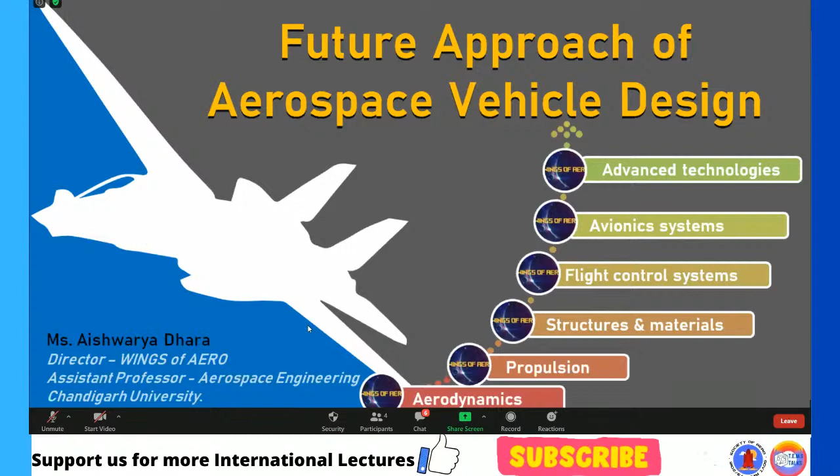Before jumping into aircraft design, you must know the very basic concepts about aerospace vehicles. First, I will give an introduction about the flight vehicle and its components, control surfaces, and basic movements of the aircraft. Then I will discuss the key factors required to design an aircraft, and a few case studies about the past, present, and future aircraft till the 2050 vision.

Before we begin, you must know what is meant by an aerospace vehicle: a vehicle which has the capability to fly in air within the atmosphere and outside the atmosphere. Aircraft can be classified into various types, first into lighter than air and heavier than air.

Lighter than air includes kites, balloons, and airships. Heavier than air can be classified into two forms: with engine and without engine. Without engine, we say a glider or sailplane. With engine, it can be further classified as an airplane, rotor wing, or ornithopter.

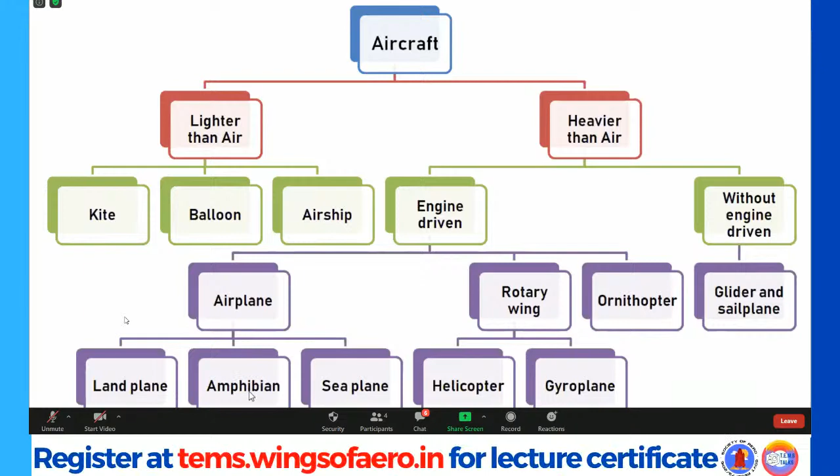Airplanes are further classified as landplanes, which land on land, not on water or other surfaces - most fighter aircraft and passenger aircraft land on the ground. Amphibians can land either on water or have the capacity to land on the ground. Then seaplanes, a very special type of plane which can land on water.

Rotor wings are further classified as gyroplanes and helicopters, both having rotor blades. So these are the basic classifications of aircraft.

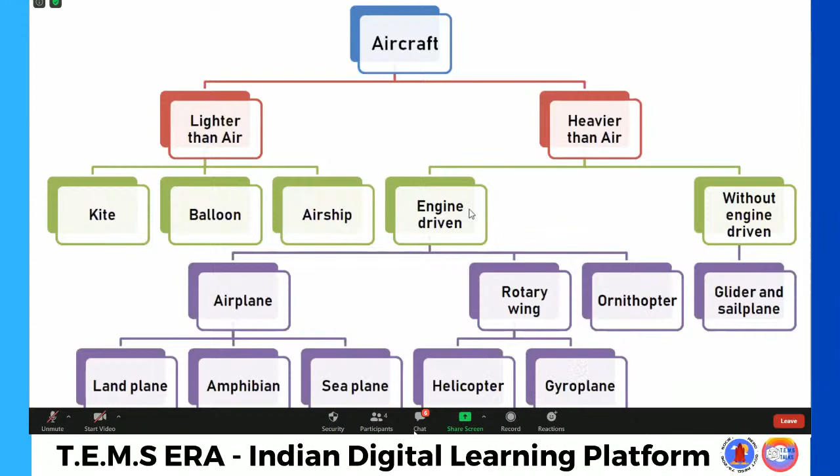Now we will see what are the flight vehicle parts. It is very important when we begin to design that we know the basic parts of an aircraft. You can see this is a sample aircraft in my hand. Basically, any aircraft has four basic units.

First is the wing surface, which helps produce lift. Then comes the intake, meaning the engine - here is the engine. What the engine does is help propel the aircraft forward, producing thrust. Then the tail.

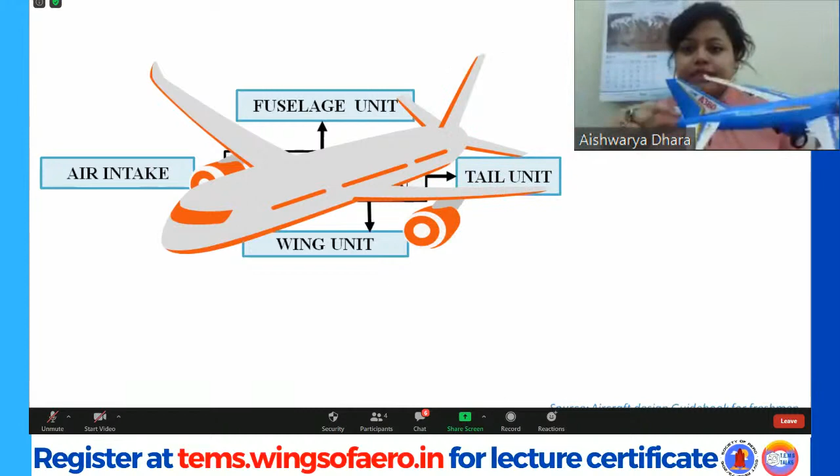We have two types of tail: vertical and horizontal. This is a vertical tail, with a control surface called the rudder. In the horizontal tail, we have the horizontal stabilizer and the control surfaces. Using the control surface called the elevator, we can make the aircraft move.

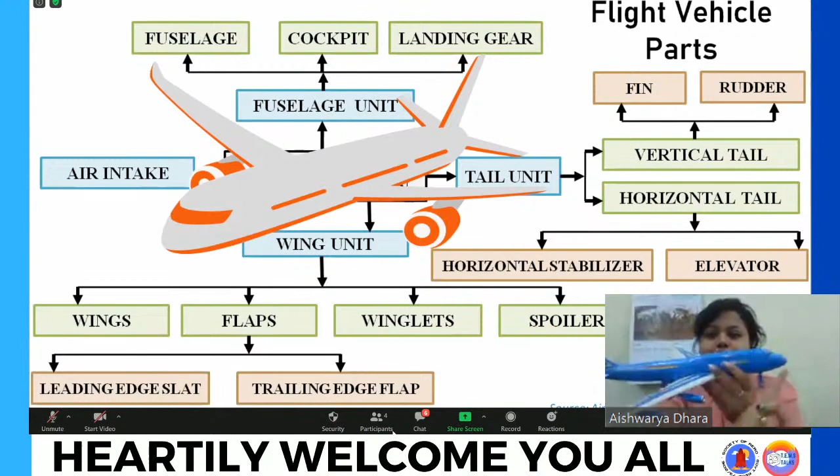Then moving to the fuselage section - the entire body where passengers are accommodated, where luggage is stored, or in military aircraft, where missiles are loaded. So these are the basic units of any aircraft or space vehicle.

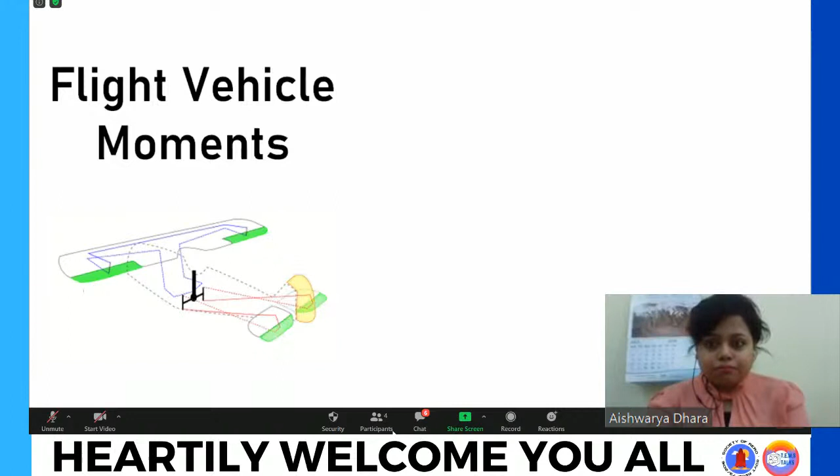Now it is very important to know the basic flight movements. Until you know these, it is difficult to understand how aircraft design begins. Basically, any aircraft has three movements. First is roll, done by means of the aileron.

The aileron is located on the wing surface. Here is a wing, with the starboard and port wing - also called the right wing and left wing. In this part, we have the aileron.

With the help of the aileron, when it deflects downwards, high pressure is created, which helps it to roll by creating high lift. On the other side, the aileron will be deflected upwards.

So what happens, due to the differential movement, it causes a rolling movement. This movement is called the rolling movement.

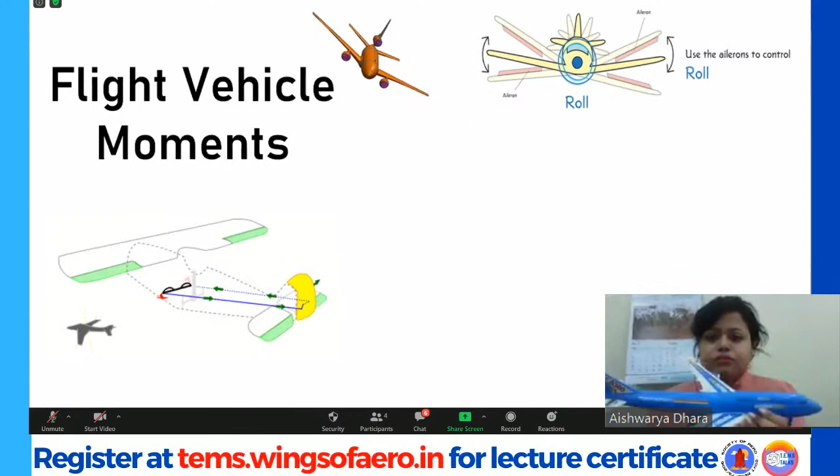Next, we have the pitching movement. Pitching movement is done by the elevator, which is located on the horizontal tail plane. Using this tail plane, when the elevator is deflected downwards, the nose will go in the downward direction because it creates a lift. This is how the pitching movement occurs, vice versa, nose up and nose down, by controlling this elevator.

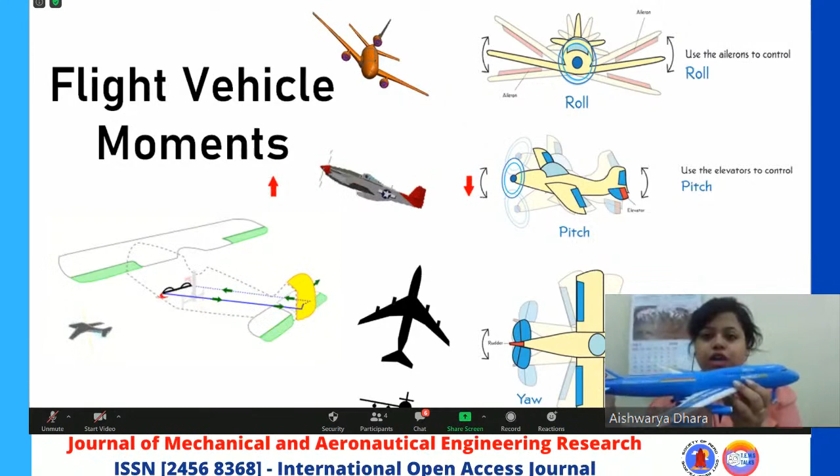Then the last one, we have the yaw movement. Yaw movement is done by the control surface called rudder, which is located on the vertical stabilizer. It can move left and right. Using the movement of this left and right direction, the nose can also move to the right and the left, vice versa. If the rudder is moved to the right, the nose will also move to the right. If the rudder is deflected to the left, the nose will also move to the left.

So this movement, the left and right movement, is called the yaw movement. These are the basic movements of any flight: rolling, pitching, and yaw. Now we will come to today's phase: what is the future of the aerospace vehicle technologies now, and what will be beyond.

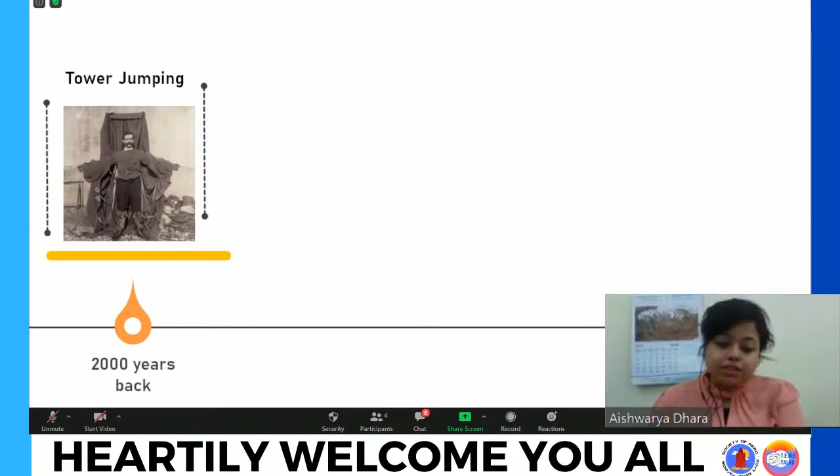Before that, you must know that for over 1,000 years, man wanted to fly and move from one point to another. There have been stories of people strapping bird-like wing structures made of stiffened cloth onto themselves and attempting to fly from towers. This is how, initially, 2000 years back, it was tried.

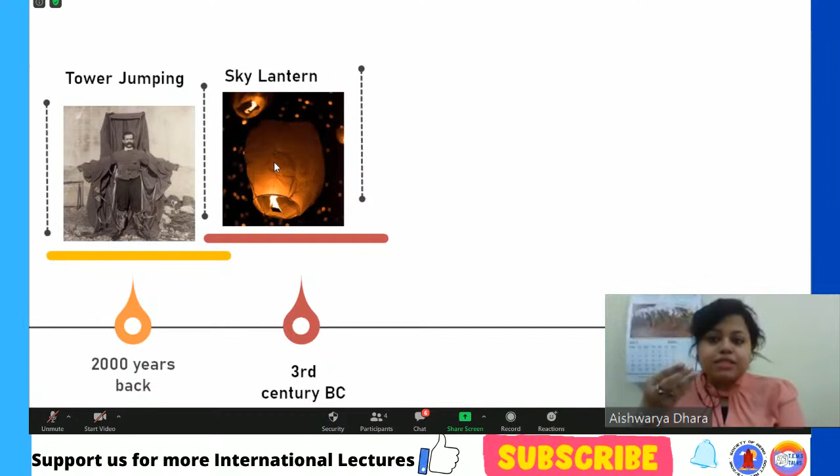Later, in the 3rd century BC, the sky lantern was developed, and the principle of the sky lantern is based on the hot air balloon. Once the air gets heated, the density becomes lighter, and as it becomes lighter, it lifts off. This is how the sky lantern was developed.

Back in the third century, China and other people used the sky lantern to scare enemy troops. Gradually, in the 18th century, the balloon became a major rage in this evolution, and it also helped provide an understanding of the relationship between altitude and the atmosphere.

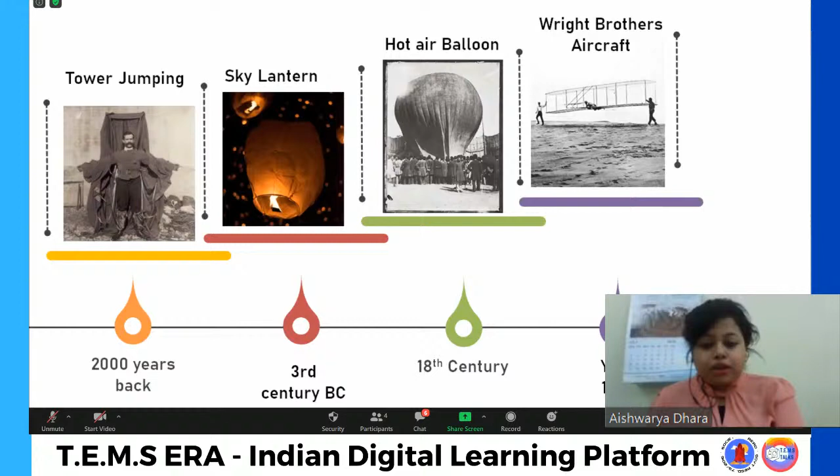Then, using a methodological approach to the controllability of the aircraft, the Wright brothers also built and attempted to build powered gliders in the year 1903.

After that, over a period of time, it evolved from the cloth and wood biplanes of the 1920s, where wing structures were made using wood and cloth mounted over it. Gradually these evolutions kept developing, and by the 1930s the first all-metal single-wing aircraft was developed.

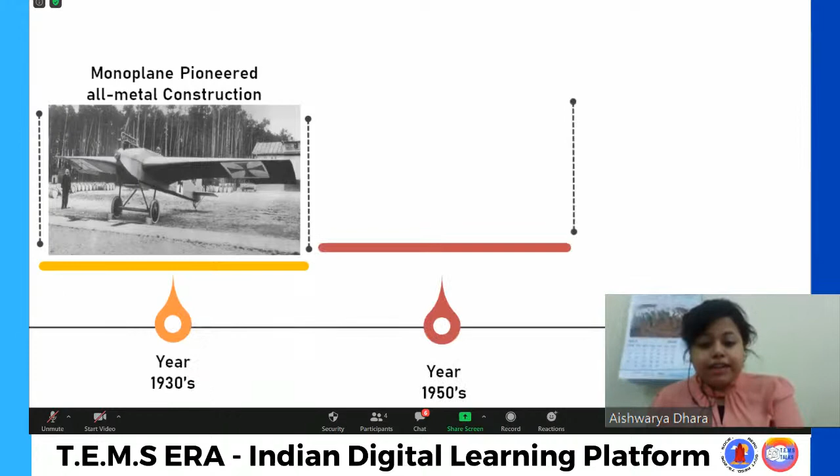From there it developed into 100-passenger transport aircraft in the 1950s, and gradually into the modern jet aircraft. This is the Airbus 380, a double decker, which has the capability to reach any point in the world within a single day. So this is how the aircraft of the 21st century may look, but it will be fundamentally different in the future.

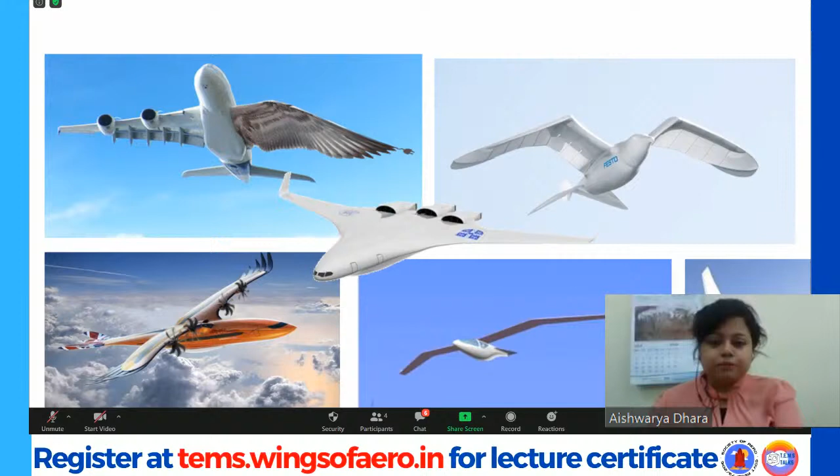All these inspirations begin from watching birds. As you know, everyone likes to watch birds, and when we look at birds, we feel like flying in the air. So this concept is biomimicry, or we can say engineering in nature's style.

Biomimicry is defined as the practice that learns from and mimics strategies found in nature to solve human design challenges. This is how even NASA has been inspired, and they have developed the very next generation, not as a blueprint, but as a biomimetic mode.

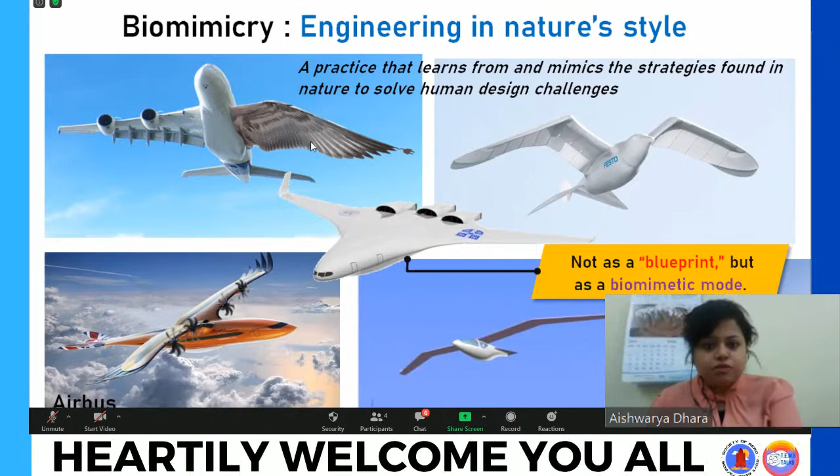As you can see, this is a blended wing body, which looks similar to a bird. Even recently, news came from Airbus that they have been developing a hybrid electric airliner, which aims to show the potential use of biomimicry in aviation design. You can see the winglets; they look almost similar to the feathers of birds.

So today our main concern is the aerospace vehicle design, which states that any design is an integration of new technologies and systems with the current and advanced configuration.

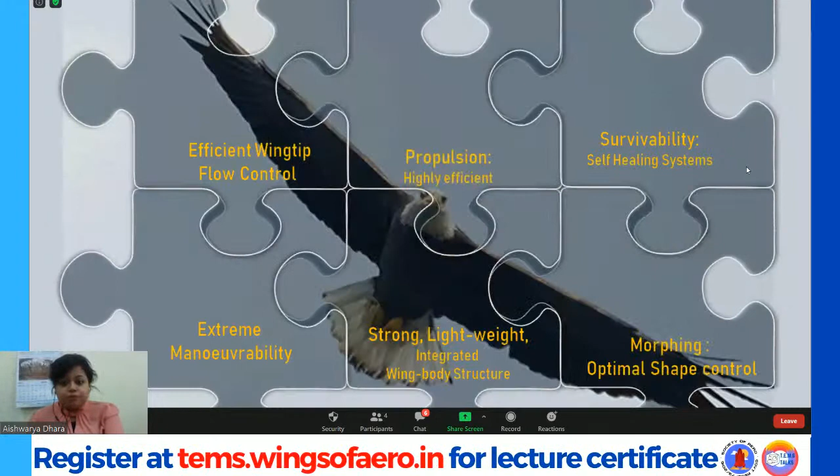Now consider our national birds. All we know is our national bird is the eagle. Eagles are being fully integrated with all the systems found in real aircraft, as you can see: efficient wing tips, propulsion system, survivability, extreme maneuvering, strong and lightweight design, and even morphing wings. The wing can be flexibly folded.

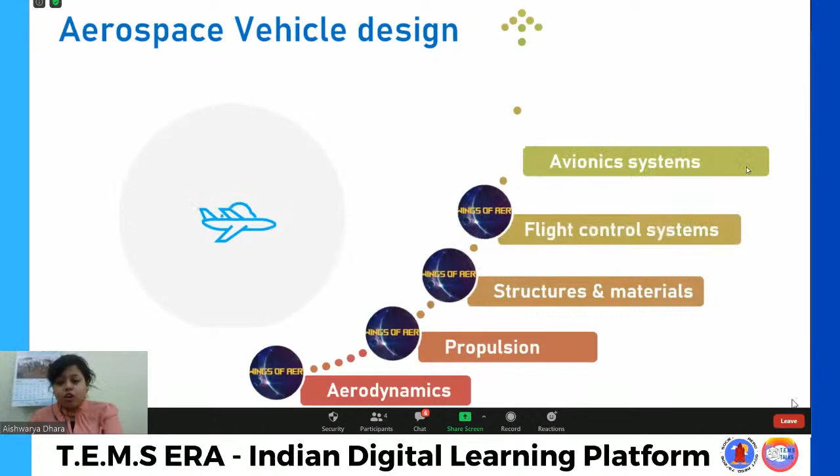So looking into this, an aerospace vehicle must aim to meet all the requirements for flying within and outside the atmosphere, and must have the following qualities. The first quality we need is aerodynamics. Next comes propulsion. Then structure and materials, flight control, avionics systems, and of course we need to develop some advanced technologies. Now we will look at each one deeply, how changes in aerodynamics, propulsion, structure and materials, flight control systems, avionics systems, and advanced technologies can improve aerospace vehicle design.

Now, before beginning any design, one must understand the following criteria and elements. First, what is the customer requirement, or what is the demand at present? That is very important to understand. Without understanding the present requirement, we cannot step forward to any design.

After that, in aerodynamics, the important factor is size and aesthetic. Size means in aircraft we cannot make a very bulky thing. We must optimize the size and shape, how it will look like - maybe the design of a fuselage, the wing structure, engine locations, and many more. More detail will come in the upcoming slides.

Then comes functionality. Whatever we are using, we must think about the function - whether it is useful to bring into the design or we must avoid it - and what are the weight factors, because weight is one of the prime concerns in aerospace vehicle design.

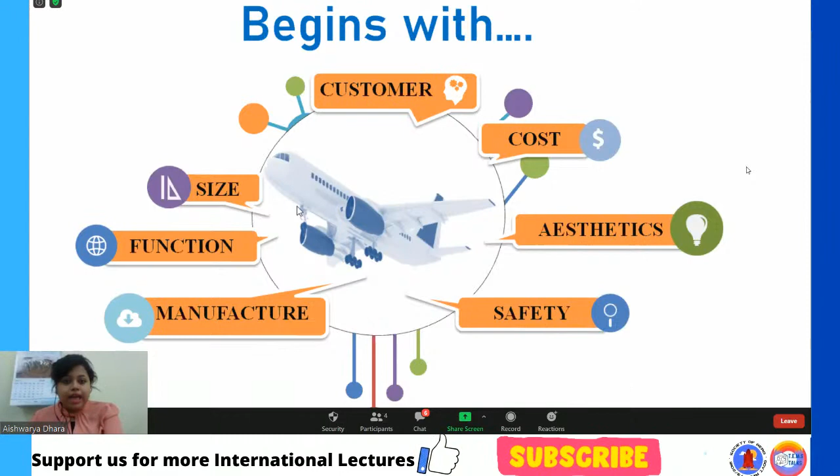So when we begin to design any aircraft, it is very important to know the following qualities. One must justify these qualities before they begin to design: first the requirement, then quality, size, aesthetic, function, manufacturing, safety. Safety, when we talk about passengers, is another big concern. Then of course the cost - we must reduce the cost of the aircraft. So these are the factors.

Now we will see how all these factors create a huge impact on aerospace vehicle aerodynamics, propulsion, structures, flight control systems, and advanced technologies. Now we will start with aerodynamics.

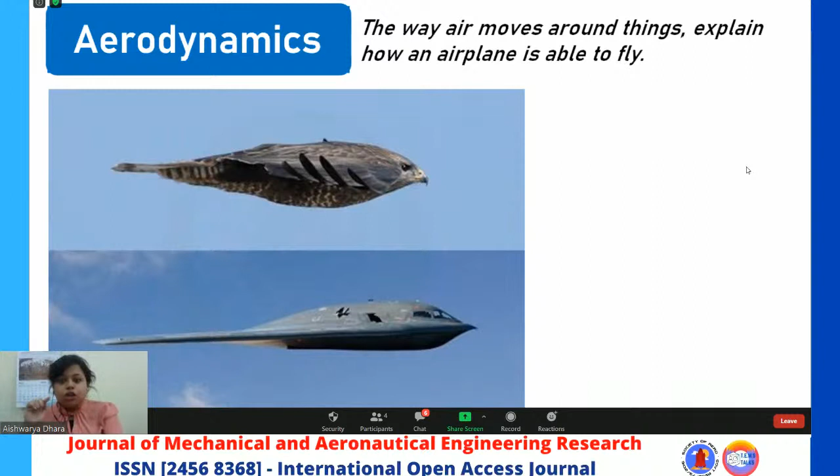Now, this aerodynamics - first we'll see what is aerodynamics. Aerodynamics is the study of flow over any moving body. Here we are concerned about reducing the drag of the aircraft, because by reducing drag we attain better fuel economy. As you can see, when the flow moves over the bird, it has a streamlined pattern. So we must remember, when we design an aircraft, it must have a streamlined pattern - that is one important factor. The second factor is a smooth surface. By creating a smooth surface, we help to resist and avoid creating air resistance to the flow. So we must have a very smooth surface. These two are the main criteria.

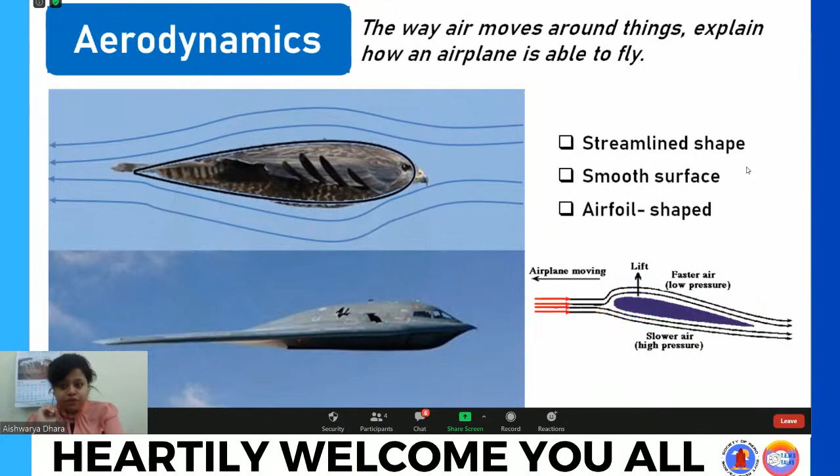Now the streamlined pattern is technically called an airfoil shape. As you can see in the bird, when we define the structure, it comes as an airfoil shape. What is the benefit of the airfoil shape? We will see - it helps to produce lift. As we increase the angle of attack of this airfoil, the bottom part creates high pressure and the top has low pressure. To bring equilibrium, the flow tries to move from high pressure to low pressure, so it naturally pushes the object up, creating lift. This is how this concept evolved.

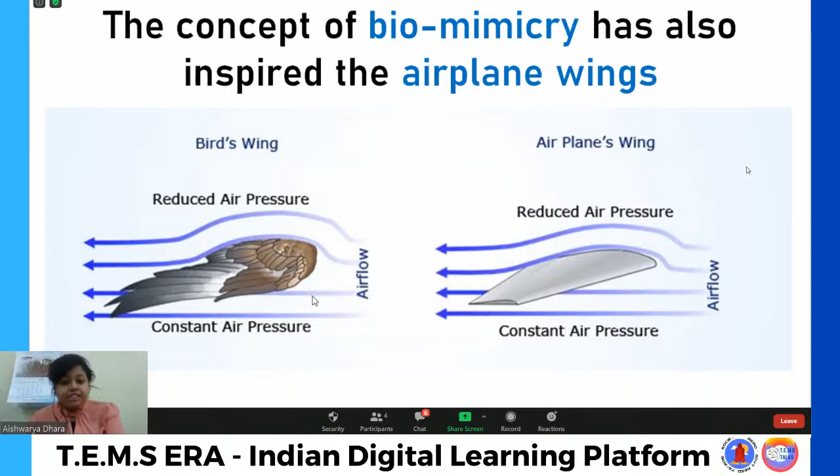The concept of biomimicry has evolved to inspire the aircraft's wing structure. When birds want to take off or land, they raise their wings - the same concept has been used in the aircraft wing system.

When we talk about the wing shape, it is one of the main parameters that drive the aircraft performance to meet the aerodynamic optimization, or aerodynamic shape optimization. This plays a great role in designing the wing.

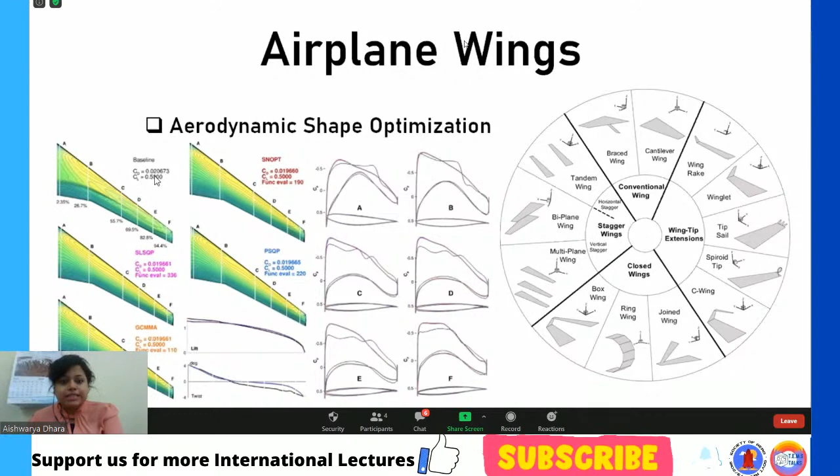Now how can we do this aerodynamic shape optimization? There are so many tools at present. You can see here one example from research that is going on. This is the structure of a wing split into various sections, A to F, each with a different airfoil - a streamlined cross section of the wing. They look at the pressure coefficient on the top and bottom surface when flow passes at a certain level. They use several optimizing parameters and bring the result close to the same. This is how aerodynamic shape optimization is done before they actually manufacture the wing.

Before you start designing the wing, you must know the flight speed. The flight speed can be defined in aeronautics by means of Mach number, which is the speed of the object divided by the speed of sound. The speed of object means the speed of the flight vehicle, and the speed of sound is generally taken as 340 meters per second. This is how we define the Mach number.

Based on this Mach number, the flow is subcategorized into subsonic, supersonic, transonic, and hypersonic. Subsonic is when the Mach number is less than 1. Supersonic is when the Mach number is greater than 1. Sonic is when both the speed of the vehicle and the speed of sound are the same. Transonic is the transition between subsonic and supersonic, ranging between 0.8 and 1.2 Mach number. Hypersonic means when the Mach number is more than Mach 5. This is how we subcategorize, and based on this category, we need to optimize the structure or design of the vehicle - this is a prime concern in designing the aerodynamic parameters.

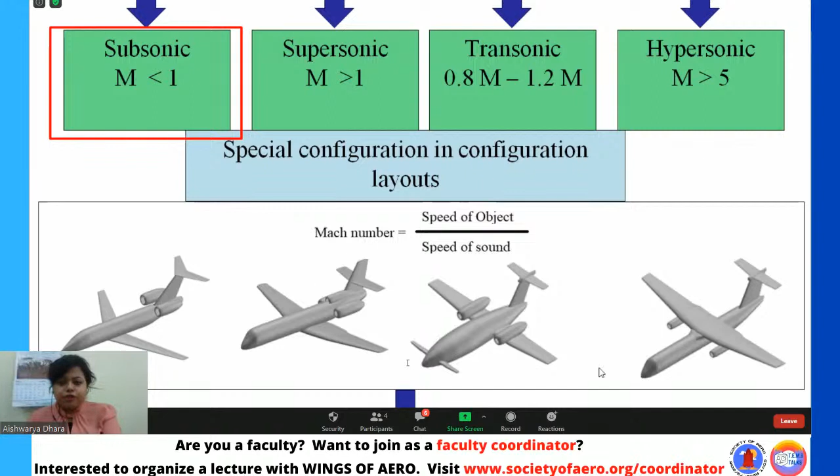There are four types of designs on display based on various wing locations. The first has the tail near the tail section in an inverted V shape, a low wing, and a very sharp nose cone. The second has a flat bottom part, a conical nose, three engines, and a cruciform tail configuration. There are a lot of differences among the four designs. Based on aerodynamic performance and optimization, you must conclude which design will be beneficial, keeping in mind shape, size, function, manufacturing, safety, and cost. All these constraints must be satisfied.

This optimization can be further extended. For example, there is much difference when you design for subsonic versus supersonic. Subsonic is when the Mach number is less than 1, and supersonic is when the Mach number is greater than 1.

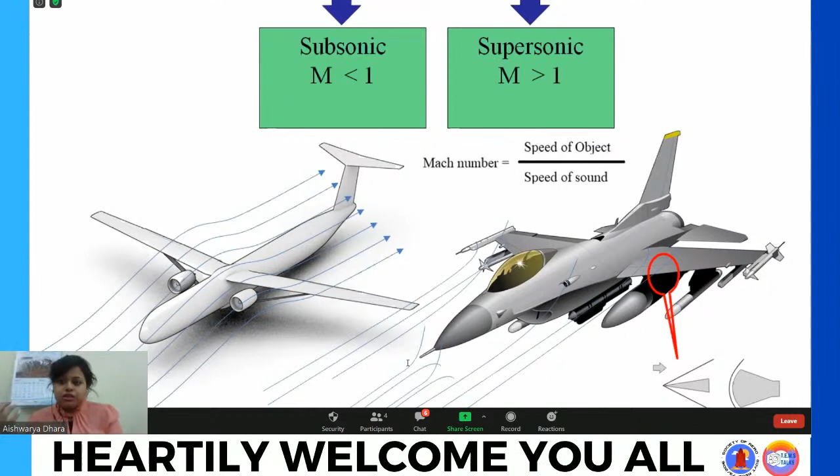It will create a detached bow shock wave, and in this bow shock wave it creates a heavy pressure difference in front of the structure. Due to this pressure buildup, it can also cause structural damage, and if it causes structural damage, the aircraft is no longer stable.

It can lead to a fatal accident. So keeping this constraint in mind, when we are designing for a supersonic aircraft or supersonic speed vehicles, we must have a sharp leading edge or sharp edge on all the leading edges. Also, when the flow moves along it, it creates an attached shock wave. These are the constraints we must clearly remember before we develop any aircraft.

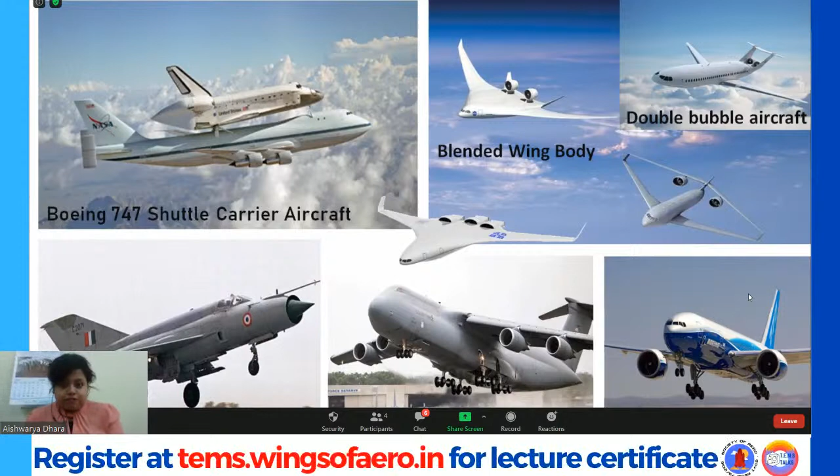So many things are happening, and in the future there are some upcoming vehicles. NASA and others have tested blended wing bodies, as you can see. Then this is the double bubble design, one of the upcoming generations. NASA has predicted that in the upcoming generation we will have such kinds of aircraft. The current designs will become obsolete, and the blended wing body will account for around 50 percent growth by the 2050s.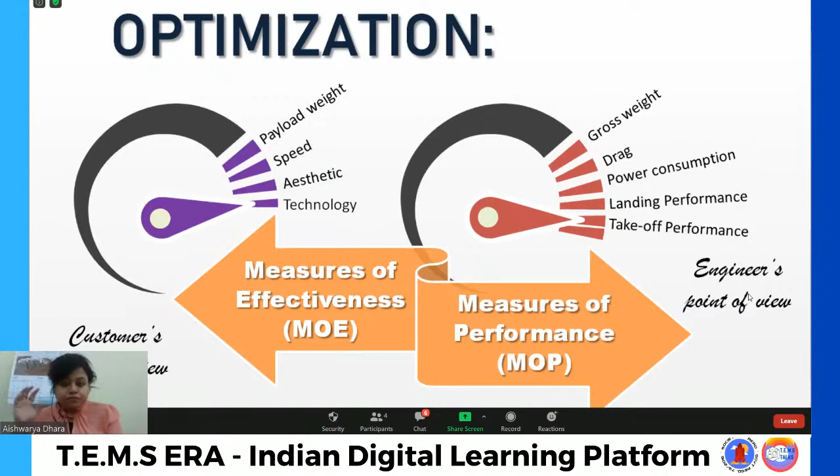The more the drag, the more the fuel consumption and the lower the performance of the vehicle. So the aerodynamic design will be much more effective. If we can reduce drag, it will help improve efficiency and enhance performance. This is why aerodynamic shaping is a prime important factor to design any aircraft.

Many people keep asking whether the blended wing body will be the future. Yes, of course it will be the upcoming future. 50% of aircraft will be of the blending body type. Now how? There's a wonderful story behind this blended body concept.

This blended body concept started in the 1920s, developed by a scientist named Nicolas Woyevodsky. He developed and tested it, but during the test he had an accident, so that design was abandoned. Then in the 1940s, another scientist, from Miles, developed the M.26 project. But after developing and testing it, they didn't find much difference in performance, so it was again obsoleted.

Then NASA took over the concept in the 1990s. Gradually, through continued research, they developed a small prototype unmanned air vehicle, the Boeing X-48. They designed it with a payload capacity such that around 450 to 800 passengers could be accommodated in that particular aircraft. You can imagine what a huge amount that is at one time.

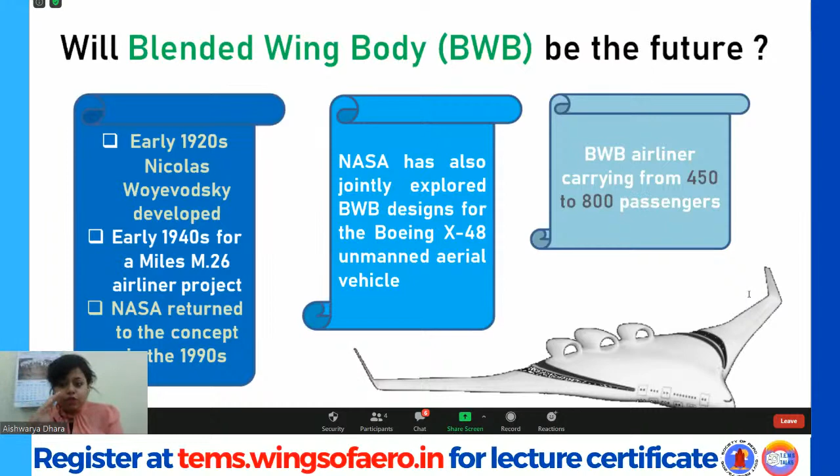They also found that, compared with the conventional aircraft, around 20 percent fuel savings could be achieved. This is a wonderful concept, and as you can see, it's almost like a bird-like structure.

Even recently, news came from Airbus on the 11th of February that they have fundamentally demonstrated this blended body concept. They have also declared that by the 2040s to 2050s, blended wing body airlines will be implemented for about 50 percent of aircraft. They have stated that clearly.

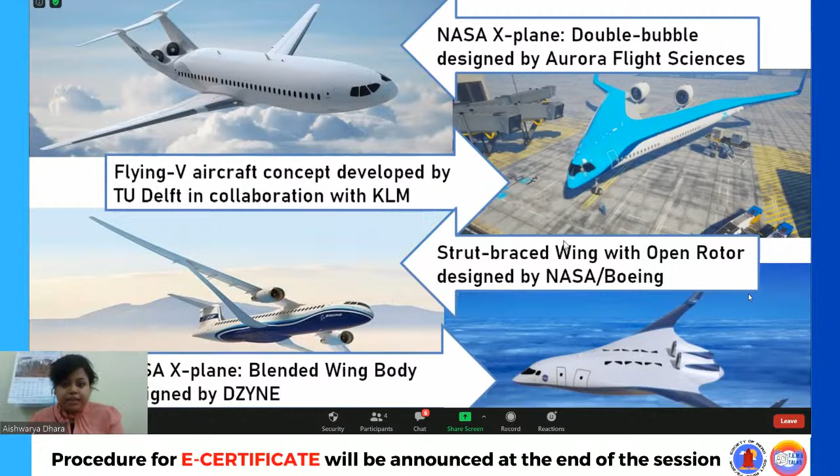Not only the blended body, but a lot of research is going on with designs like the double bubble design, and also this V-shaped wing you can see here. Then there's the strut-braced wing, along with the blended body. These are the upcoming futures of aircraft.

Now when an aircraft is flying at some altitude, it must undergo some kind of loadings on its structure, such as air loading, inertial loading, loading due to the power plant, meaning the engine, loading due to landing, takeoff, taxiing, towing, jacking, or even bird strike. These are the following loadings an aircraft can undergo. Based on that, it's very important for a designer to design the structure accordingly.

Based on this research, researchers modify the structural design of the aircraft for these applications. The structure of the aircraft consists of ribs, which give the defined shape of an airfoil in every section. Then we have the stringers, which attach from the root to the tip, running longitudinally. Then we have the spars, mostly of I-shape or C-shape, as you can see here. All these supports give the structure its rigidity. These are the basic structures.

In advanced research, they have modified the structures based on the type of aircraft. When we talk about multi-rib wings, it means the number of ribs will be more compared to the stringers or spars. Multi-ribs are mostly used for transport aircraft, such as passenger aircraft and cargo aircraft.

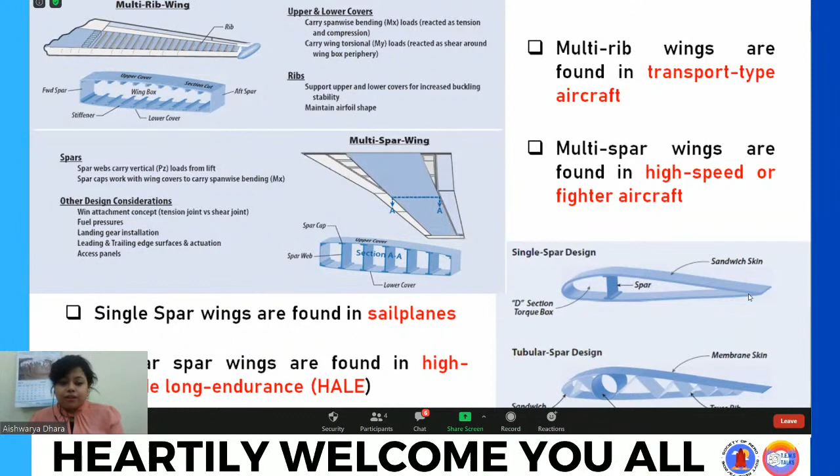An amazing design has been done as a tubular spar design. These tubular spar designs are used for high altitude long endurance aircraft. High altitude means going more than 15 kilometers from the ground up toward the atmosphere. Endurance is a term used in aviation meaning how much time the aircraft flies in the air. Long endurance is when an aircraft can fly more than 24 hours, not less.

For such aircraft we use this tubular spar. These are high altitude long endurance aircraft, mostly UAVs, like the well-known Global Hawk and the Boeing Phantom Eye. These have wide applications for surveillance, and some are used for predicting atmospheric properties and other factors.

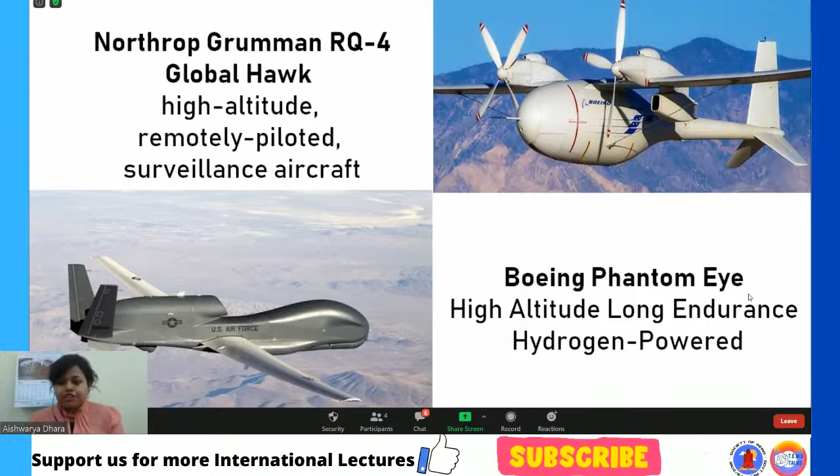Once we move out from these structures, another important thing humans have aimed to discover is an alteration of the design. This concept was developed by watching birds: when birds want to move faster, they flap their wings. The same principle has been implemented in planes, called wing morphing.

Most modern aircraft use a fixed wing, as shown in previous slides, meaning the angle cannot change. But with a morphing wing, the aircraft can have multi-role capability and can sustain in the air for longer, even during flight.

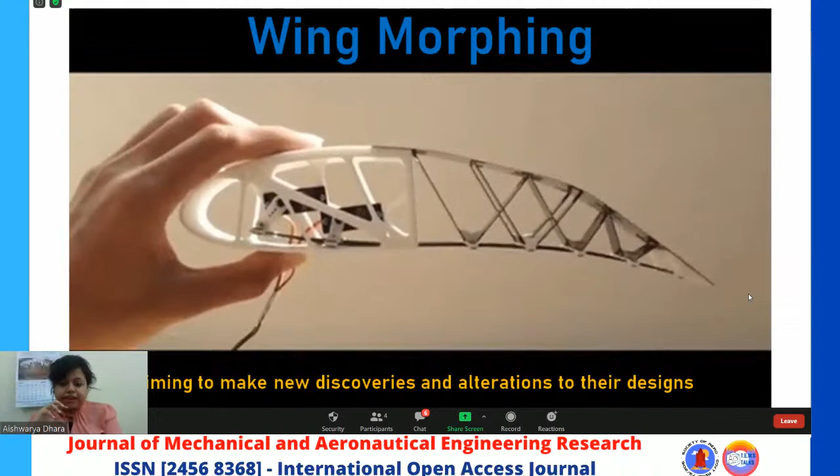Scientists have said that when the wing transforms, it is easy to steer in the air and it flies much easier than a fixed wing. A lot of research is going on; even NASA is pursuing this study, getting inspiration from biomimicry-inspired aircraft, using many advanced materials that are lightweight and more effective to build.

Weight has been a prime concern for decades. Aircraft builders and designers working on wings have the main concern of making them strong and stiffer. These structures look almost bird-like, as they've imagined the bird and implemented it in the wing structure, and this will be the future.

They achieve this by using new smart materials embedded with sensors and actuators. These sensors measure the pressures over the entire surface of the wing, and the signals actuate how to respond, like a feedback mechanism responding to one another.

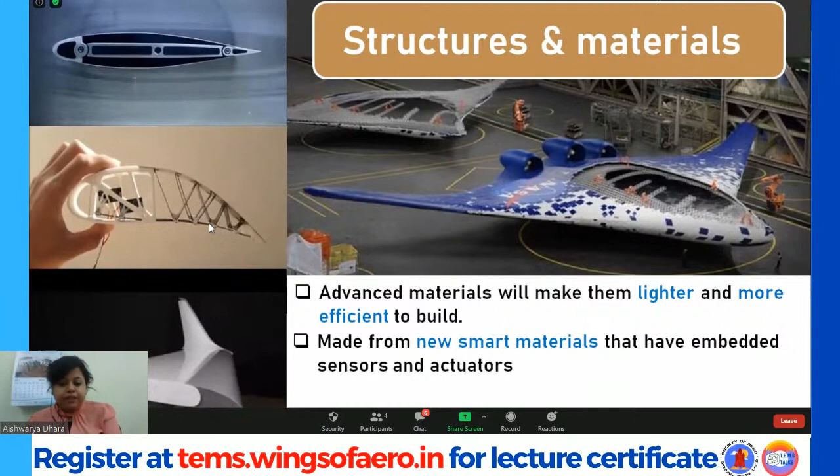Tiny computation elements detect how the aircraft responds to the signals, and eventually they learn how to change the shape of the wing and optimize based on the flying conditions, using data from the sensors.

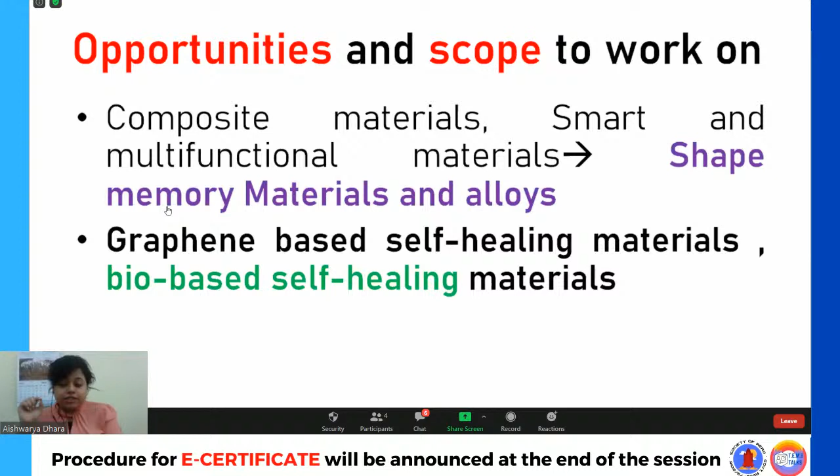There are wide opportunities to work on: composite materials, smart materials, multifunctional materials like shape memory alloys, graphene-based self-healing materials, and in the future bio-based self-healing materials, since fossil fuel resources will become extinct and oil prices will rise, so the only option will be bio-based.

Another wonderful area is studying the effects of metamaterials on aeroacoustics, like radar absorbing materials. These implementations are mostly used for fighter aircraft, known as stealth technology.

This is all the growth of composite materials. In the Airbus 350 XWB, they have used around 53 percent composite material. Looking at the Boeing 787, they have used almost 50 percent.

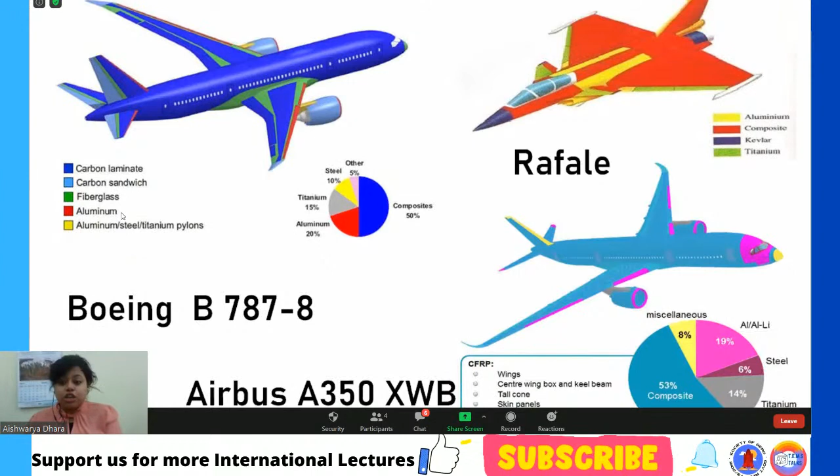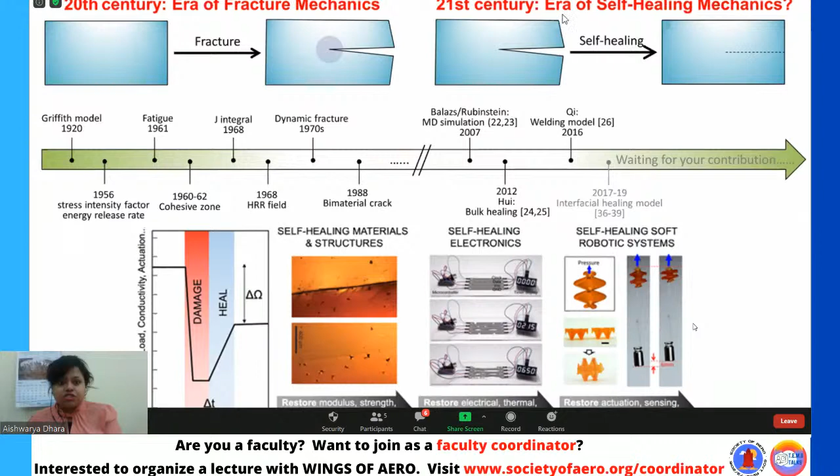Before, in the 20th century, they were studying fracture mechanics, how the fracture begins. But today, in the 21st century, they are studying how the self-healing mechanism is going to work, and more detailed, more awaiting technologies are going to come. Now, after this, the material structure part is done.

Now after the wing we will come to the propulsion, which allows the body to move forward. That means the engine needs to integrate the health management systems.

In an aerospace vehicle, engines can be classified into two types: air breathing engine and non-air breathing engine. Air breathing, by the name itself, means the system will operate within the atmosphere. Non-air breathing will be applicable outside the atmosphere.

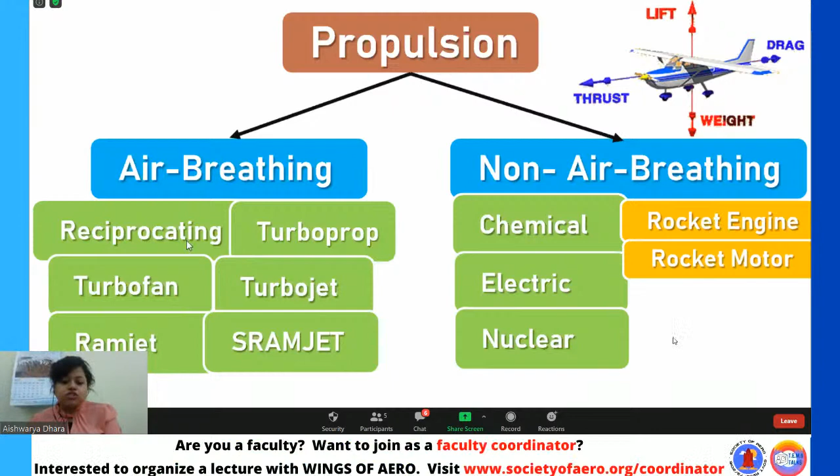When we talk about non-air breathing, that comes to rockets and such, which can be chemical, electrical, or nuclear in the future. But air breathing has been classified as a reciprocating engine, which we know as a piston engine, then turboprop, turbofan, turbojet, ramjet, scramjet. Now, the applications of these engines need to be considered based on the speed.

The flight speed should be of Mach 0.3 or less than that. Beyond that, the aircraft performance won't be successful.

Then as we gradually increase, let's move to the turboprop. Turboprop is almost like 0.5 Mach number. At 0.5 Mach number only, it gives the maximum efficiency.

Now gradually moving to the turbofan. Turbofan can be of high bypass ratio or low bypass ratio. As we increase and go nearing the transonic speed, that is 0.8 Mach, we use this turbofan.

Beyond that, when we start using fighter aircraft, beyond Mach 2, we use a turbojet. As we increase the speed further, afterburners are implemented. Ramjet is not starting from zero because it needs an external device to accelerate it. Similarly, the scramjet needs an additional device to boost up its performance. Then comes the rocket, which can reach more than Mach 6.

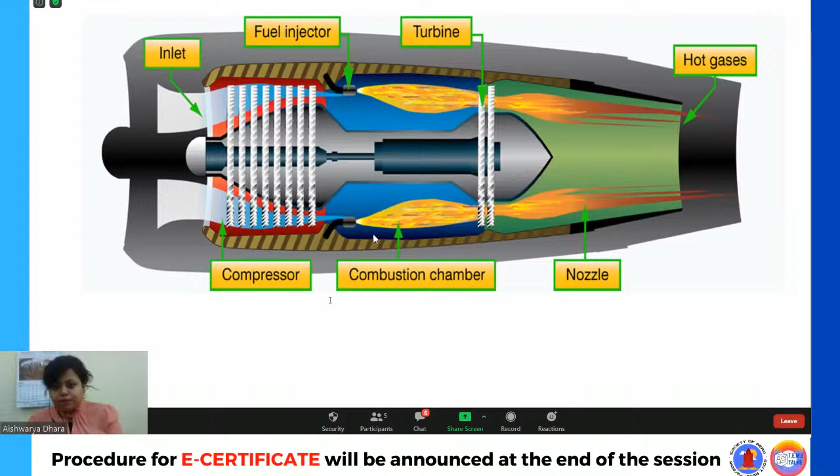As it gradually moves to the combustion chamber, what happens there? Similar to the piston engine, fuel injection takes place through a fuel injector. The compressed air and fuel get mixed up, and that hot gas moves and expels out from the turbine and gradually out from the nozzle. This nozzle helps create very high kinetic energy, which forms a thrust that helps the aircraft propel forward.

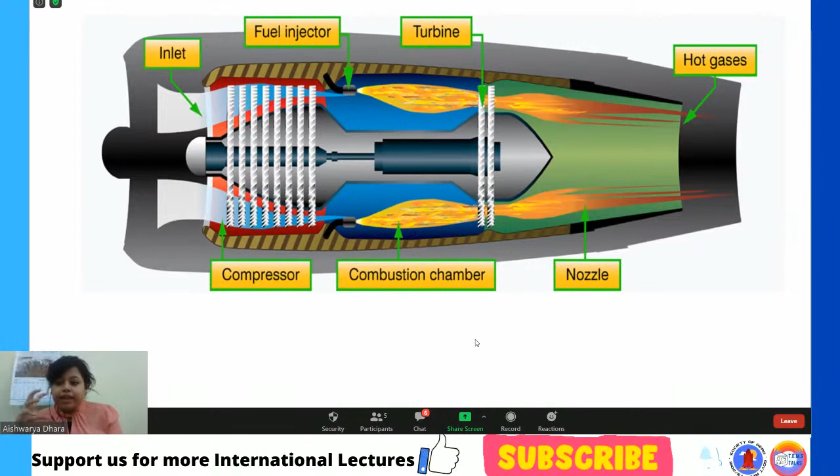But what happens with this exhaust gas when it expels out, in most cases, is that there are a lot of unburned gases, and due to this, it causes pollution in the environment. So now it comes to the point of research: how to improve engine efficiency.

Now once we increase the engine's efficiency, we can consume the fuel better, and due to that consumption of fuel, we can lead to better mixing of the compressed air and fuel in the combustion chamber. So there are many ways that we can reduce pollution, or take care of the environment. These are the futures.

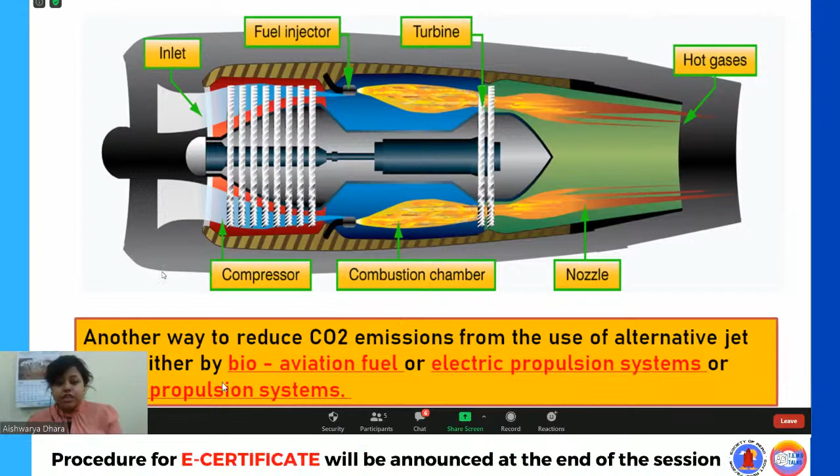They're looking at renewable energy sources, another way to reduce carbon dioxide emissions, by means of alternative fuel use in gas turbines, or electric propulsion, or hybrid propulsion systems. These are the categories we can look into for aircraft design, by changing the fuel system, either by electrical propulsion, completely run by batteries or electrical system motors or superconducting devices, or by hybrid, meaning both electric and aviation fuel. So by that we can balance the environment.

So there is a lot of research going on. You can see the hybrid electrical flight, as the Cri-Cri was the first to begin. This aircraft was developed as a turboprop aircraft before, around 1997, by Michel Colomban in France. Later he changed that turboprop engine into an electrical engine, and he successfully flew it in 2010. That is the Cri-Cri, the first development of hybrid electrical flight.

Then gradually it kept increasing, and Airbus also started with hybrid electrical propulsion, eFan 1.0. With further developments, today in 2020 eFan X has been developed, and they say that eFan X is a disruptive technology, a very unique thing.

That's what is meant by disruptive technology. It is a kind of technology which displaces the established technology that is currently in development, and which will bring a revolution in the industry, and which cannot be replaced by anyone else, and will be superior to any other technology. That is what is meant by disruptive technology, and that will be the upcoming vision of the 2050s.

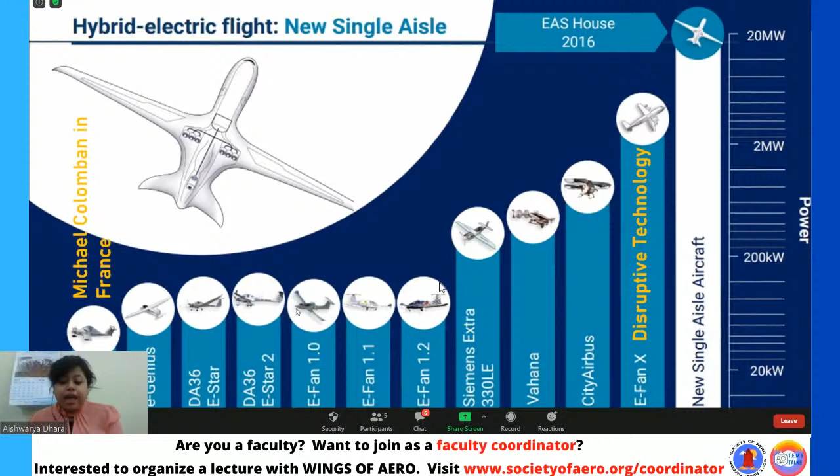The eFan X has been developed, and achieving these goals is really a very challenging task. Particularly by 2050, they have declared that 50 percent of the carbon footprint has to gradually go down. With that, many people are working together, starting from aircraft manufacturers, airliners, and airports. All the four pillars are the technologies for aircraft and engine, sustainable fuel, operations infrastructure, and market-based measures. All those factors are a great concern.

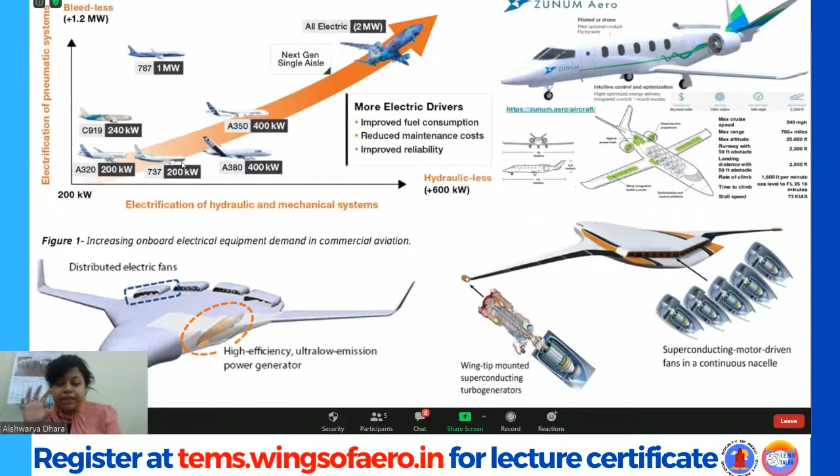I would like to show you one more startup company from Washington, Zunum Aero. This name is derived from hummingbird. They developed this aircraft between 2013 and 2018, and their main concern was a 50-seater passenger aircraft, driven completely by electrical power, maybe hybrid electrical power. So this is what the future will look like. All that we are looking at now will become obsolete.

As you can see here, superconducting things are used. Superconducting motor drives and fans are used in the nacelle to move it forward. In addition, this electric power is also used to drive the internal systems of the aircraft, and so on.

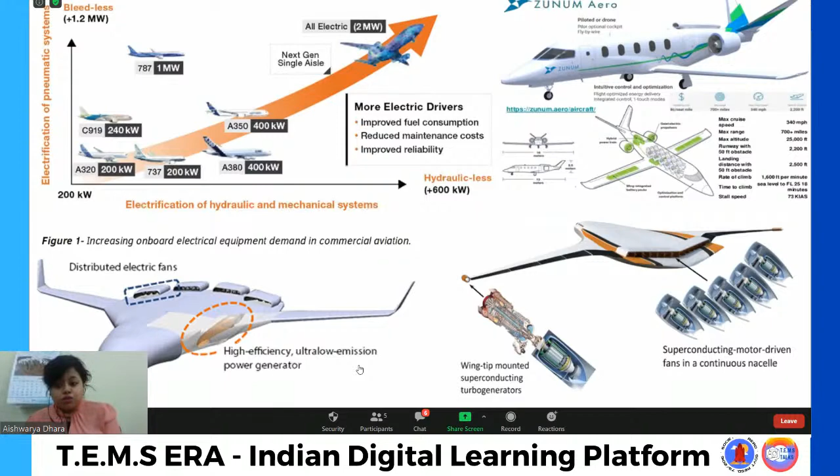This is the strategy, showing what electrical power designs and what amount of power has been developed. You can see Zunum have designed around two aircraft. One is 4 to 5 megawatts, another is 15 megawatts, both having a capacity of 50 seaters. We can see around 80 percent carbon benefits, not in the present, but they expect to reduce the carbon footprint by about 80 percent from that particular design, maybe by 2035 or so.

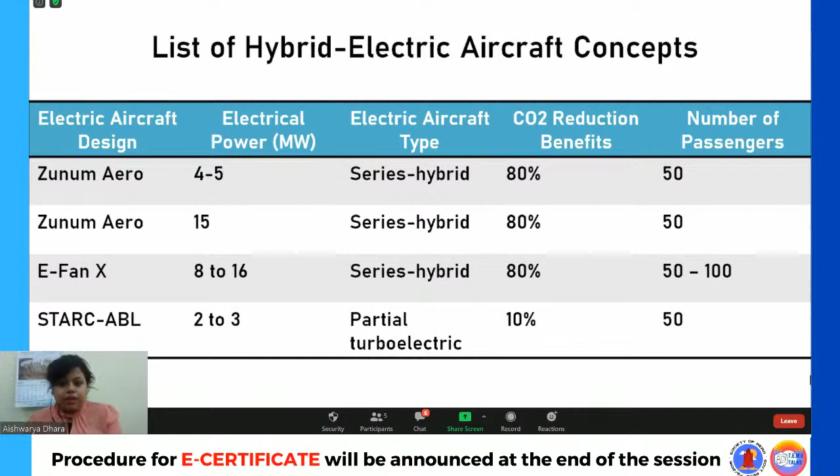So that is that. Now coming to talk about the aerospace vehicle outside the atmosphere. Outside the atmosphere, we cannot use these air-breathing engines. We need to use aerospace vehicles like rockets and so on.

Recently, all of you have seen the launch of the SpaceX Crew Dragon mission, where they used the Falcon 9 rocket, which is a new development, a reusable launch vehicle, which will launch the Crew Dragon into space, and after that it will automatically land back on water bodies or the station where they have been navigated to.

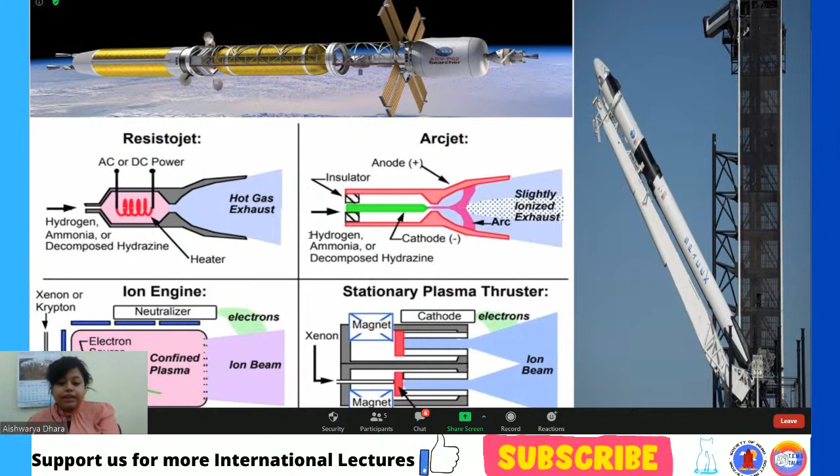So this is what the reusable launching systems will be in the upcoming future. Even ISRO is working on it. Then, sooner or later, electrical propulsion will take up. Research is already going on about microgravity, where NASA is experimentally working on the staging of electrical propulsion systems for interplanetary systems. Everything is still under research, and nuclear and electrical propulsion space systems are being considered for longer missions in the future.

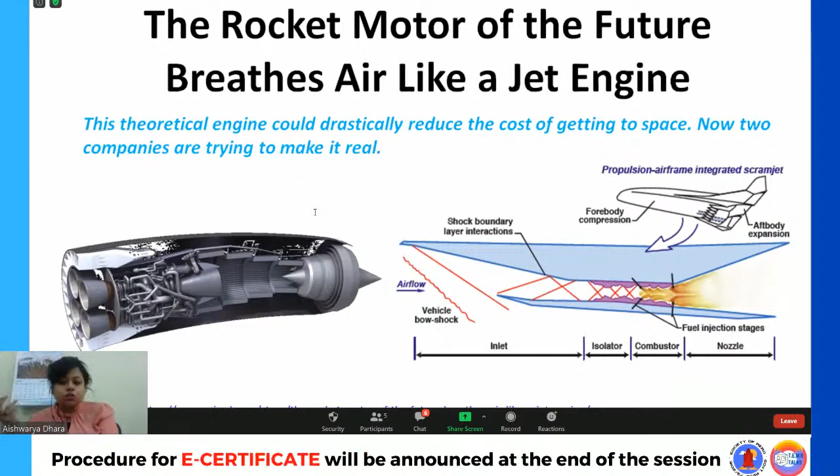So here's one more recent news about the development of rocket motors of the future that breathe air like a jet engine, functioning almost like a scramjet. Two companies have tried and tested this, and it has shown results that it can attain the speed of Mach 5. If it happens, it will be a great step towards the world's first air breathing engine which has the capability to accelerate from 0 to Mach 5, meaning it can be self-accelerated and does not need any external source to launch.

So these are the upcoming things, and a few more new engine architectures have been developed, this one by Rolls Royce. Presently work is going on for the advanced ultra fan engine. Rolls Royce is expecting a 20 percentage reduction in fuel burn and CO2 emissions, comparing with their present model, the Trent 800.

Then Safran is also developing another design, the ultra high bypass ratio engine. They have shown that a minimum of 25 percentage of fuel burn and CO2 emission will be less compared with the Rolls-Royce Trent 800 engine.

So huge work is going on, and soon this Safran ultra high bypass ratio engine, which has a bypass ratio of about 15, uses a very unique design with lightweight composite material, helping to reduce fuel consumption by 5 to 10%. They have optimized it and found this kind of engine can be installed in the Airbus 320 Neo family, which comes under the narrow body category.

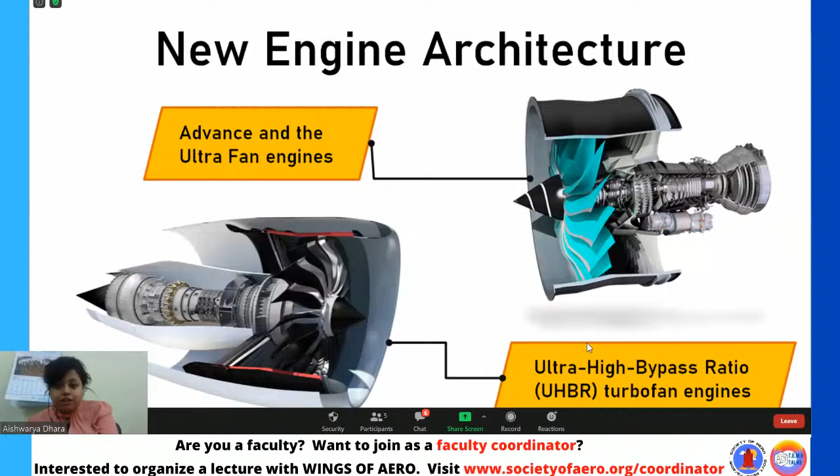So you can understand why this ultra high bypass ratio turbofan helps, because once we increase this bypass ratio factor, the overall efficiency will also increase, and if efficiency increases, the specific fuel consumption of any engine will decrease. So these are all the advanced technologies coming up in the upcoming days.

When you begin to design an aircraft, selection of the proper engine is one of the challenging tasks. In addition, talking about fuel consumption, not only the engine can help, but also subsystems of the aircraft can help grow the industry. So advances in aircraft systems can also help reduce fuel consumption considerably in current aircraft configurations.

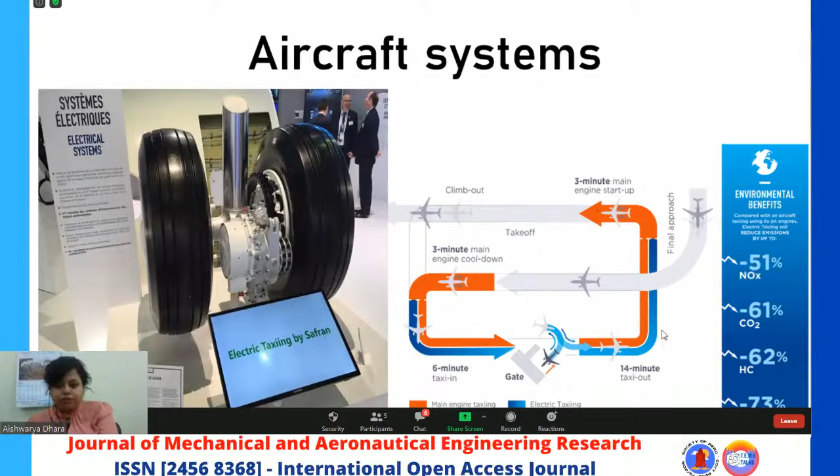Safran has developed electrical taxiing. So they have developed electrical taxiing for the ground, from the aerodrome to the taxi before it takes off. At least they can use this electrical system, reducing a considerable amount of environmental impact. So this is also one of the futures.

Now in upcoming days, there are many developments coming, like elevon systems coming up, because some space shuttles use the elevon system. Apart from that, we will look at what advanced systems and the growth of flight control systems look like. Initially, flight control systems are done by the pilot controlling the control stick or the joystick. The signal is responded to by computers or sensors, and it goes to each control surface, actuating it according to the motion given by the pilot.

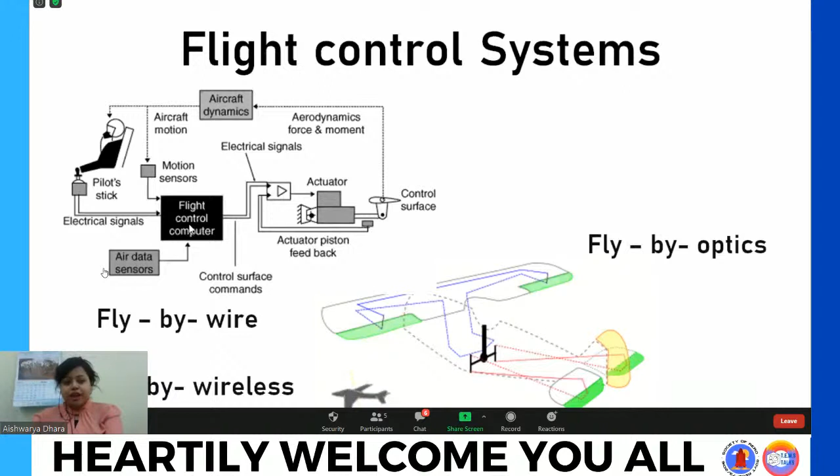But all these are the mechanical system. Now the mechanical system has been converted by the fly-by-wire system. Mechanical has been replaced by the wire mechanism, which they found, by using wires, they can reduce the weight of the aircraft.

Now gradually what happens, from the wire system it has moved to fly-by optics. Compared with the wire system, when they go for the optic system using optical fibers, they found there is a huge change in the gross weight or total weight of the aircraft. So weight is a prime concern, as I've said, a small change in the control system can affect the performance of the aircraft. So fly-by-wire has been converted into fly-by optics using optical fibers.

So they have used a redundancy process. If one fiber fails, another will take over it. So there will be a lot of data bus avionics systems into it.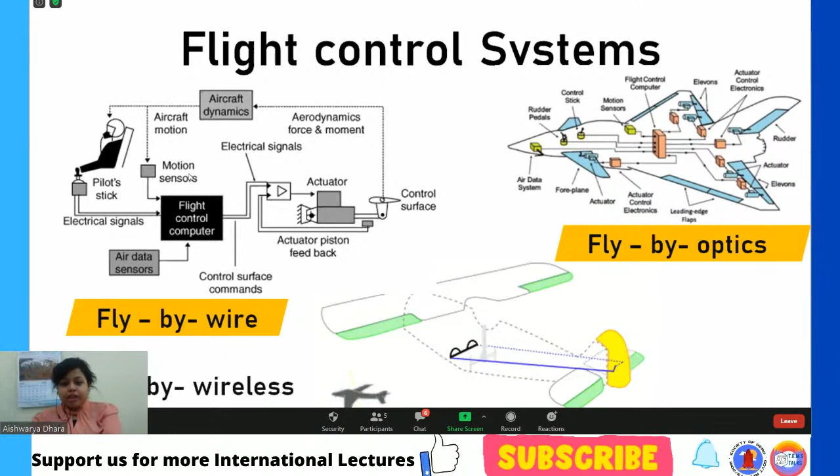Now in the upcoming future they have been working on, and even a patent has already arrived, about fly-by-wireless. There won't be any linkage or connections; all will be done by this wireless system. So you can understand, using this wireless system, there's a huge reduction in the weight of the aircraft, and once the weight of the aircraft gets lower, the efficiency or performance of the aircraft will automatically boost up.

And apart from that, one more disruptive technology is coming up in this flight system, which we are all quite well known with: artificial intelligence, which we can call AI. This artificial intelligence is much more in the research field, and in the upcoming society it will play a key role in doing all the activities in the future.

Either we can talk about knowledge extraction. Knowledge extraction means we are extracting knowledge from unstructured documents, or whatever information we want to get. All these things will come from this knowledge extraction.

Then comes computer vision. Computer vision is about transforming images and videos into objects, and that will be taken or converted by means of deep learning and decision making.

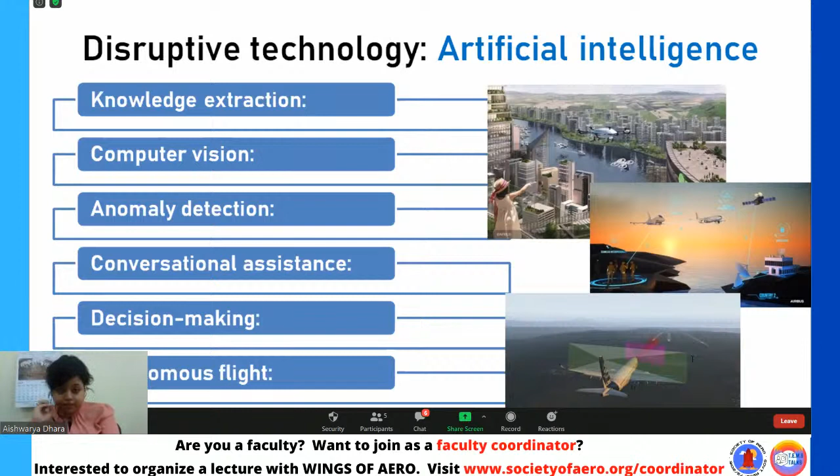Then comes anomaly detection. Anomaly detection means that if there are some hidden patterns in the data, it will help to detect the thing by means of artificial intelligence.

Then we come to conversational assistance. Conversational assistant means the way of communication, that the designer will make a language interaction system. So whatever the language, they can interact, communicate, build and develop, and they can keep on giving the inputs.

Then comes decision making. This brings an optimal solution for a very complex constraint problem. Decision making can take the decision by itself by means of artificial intelligence.

And this autonomous flight technology has already been implemented. This next generation aerospace vehicles bring a new capability to do that. Everything will happen autonomously - part detections, automatic landing, tracing, everything will be done based on these artificial intelligence technologies. And in the upcoming future, more than 2050s, all will be implemented. It will be 100% artificial intelligence.

So as a nutshell, it is very important before we develop a future airplane. When we design a passenger aircraft in future, we must increase the number of passengers at a time, so at the same investment we can travel more distance, and economically save fuel.

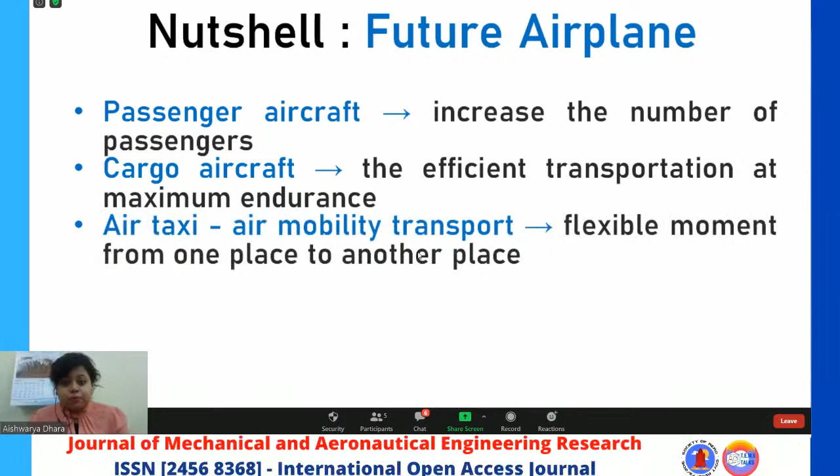Cargo aircraft must have effective transportation at maximum endurance. So this is the future: air taxiing and air mobility transportation, which will, as I said, have AI play a major role in that, enabling flexible movement from one place to another.

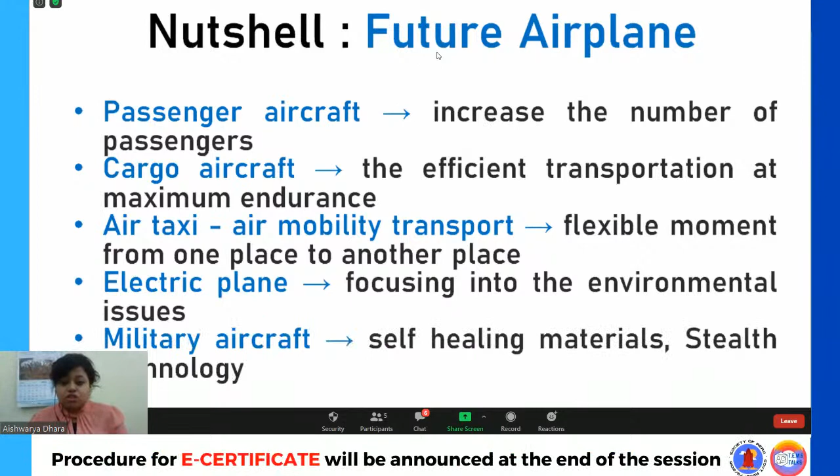And then electrical planes - as I've said, in the upcoming 2040s, around 100% of airplanes will be electrical planes, because this will focus more on environmental issues, as we have to save the environment. Then military aircraft are going to use technologies like self-healing materials, stealth technology, and so on.

So coming to a nutshell, as a concept of the future, it will be about balancing the functional and performance aspects, constrained by being more sustainable, lightweight, fuel-efficient, and with low manufacturing cost. All those four parameters will work hand in hand with the functional and performance category, because eco-friendly aircraft is a prime concern in the upcoming future.

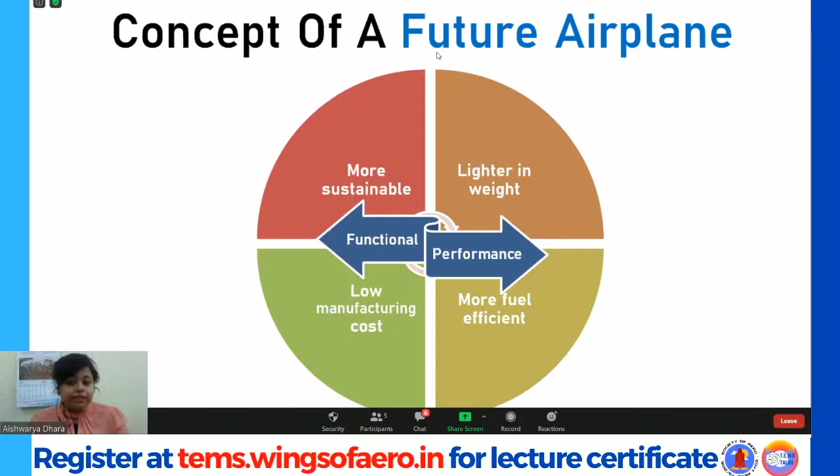Compared to today's aircraft, all the revolutionary aircraft concepts are being developed, and it plays a considerable impact on the various aspects of operation. So this is the growth from 2020 to 2050s. Now I will show you what are the revolutionary technologies in between this 2020 to 2050s.

Rolls-Royce and Safran have been developing the advanced turbofan. The growth of this turbofan will be around 20% implementation.

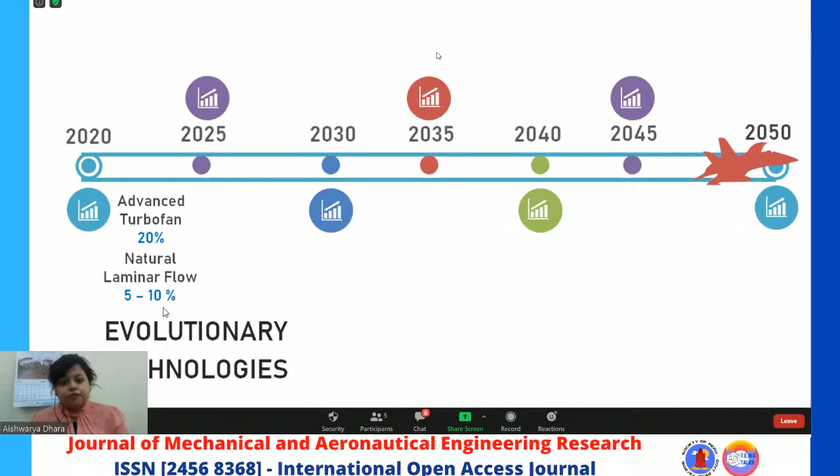Then laminar flow over a surface, that is another important concern, because if the drag produces, then the fuel consumption will be more, which we don't want.

Then coming up, within 2025 to 2030, we will have this wireless flight system where the implementation will be less, because it will take time to develop, so the growth will be around 1 to 3%.

But the ultra fan, which Safran and Rolls-Royce are making, there will be high growth of 25% within the 2030s, within the upcoming 10 years.

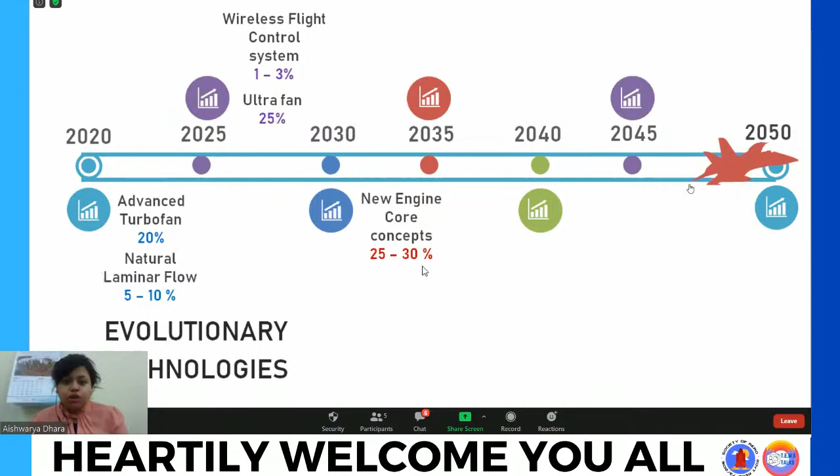Then again, within the next few years, we can see new concept engines. There will be open rotor types that will also be developed, and many industries like NASA have already tested it, and still more experimental work is going on. Soon they will implement a new engine core concept, as we have also seen that superconductive engines can also be implemented in the upcoming 2035.

These come under evolutionary technologies. After this, in the 2030s and beyond, all these technologies will be implemented, or we can say revolutionary technologies. Before it was evolutionary, and after this there will be revolutionary. All the technologies will be applied and will see a very huge hike.

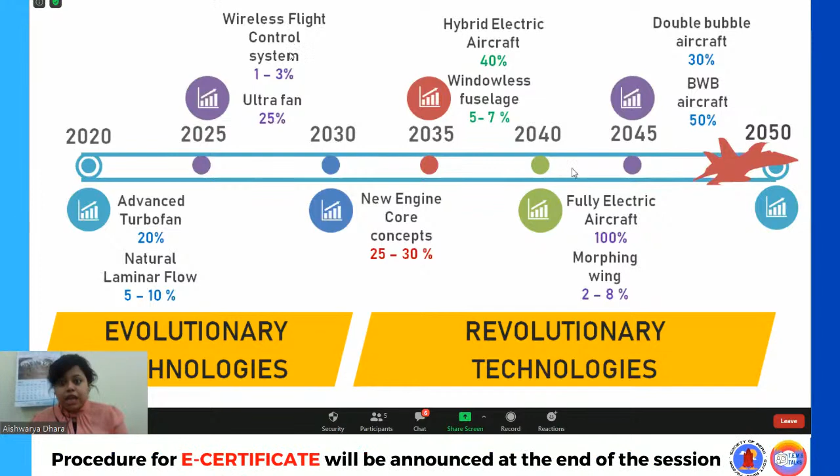As you can see, the hybrid electrical aircraft between 2035 to 2040s will see 40% growth. And in the upcoming 2045s, there will be 100% fully electrical aircraft visible.

In addition, the morphing wing - as you can see, research is still going on for this morphing wing. But the revolutionary implementation will be acting from this year onward.

And beyond that, as I've mentioned clearly about this blended wing aircraft, around 50% implementation will be done within these years, and double bubble aircraft will also be growing rapidly around 30%. So this is all about our future.

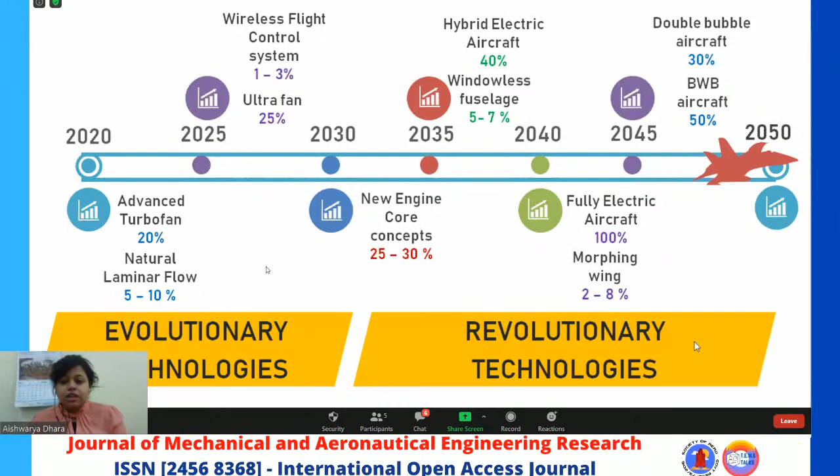These are the growth trends. There are many opportunities we can work on, and many challenges for the blended wing design, because a blended wing body can accommodate a large amount of passengers. At the same time, it has very low fuel burning, and noise produced in the environment is very low.

As you can see, the cargo facilities are there - huge amounts of cargo volume. So obviously cargo volume means the passenger capacity will be high, but the rules and regulations is another concern, as acceptance has not yet come from the FAA regulations.

Another thing - if the blended body systems are implemented, the ground service infrastructure again needs to be adapted, because the towing process, the jacking process need to be adapted accordingly. Then, from the industrial point of view, it creates a huge amount of investment.

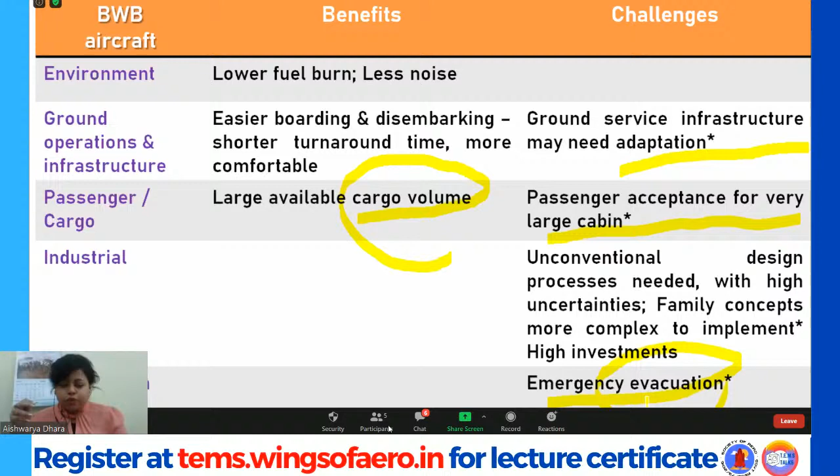One of the most challenging things I would like to highlight here is emergency evacuation, because the design of the blended wing is quite different than the conventional one. Because normally everybody will have, when we see the aisle width, someone by the window and someone on the other side, but it is not the same case in the blended wing body. So evacuation needs to be looked into, and there are many challenging factors to look at, because safety is one of the prime concerns while designing any aircraft. These are the things that need to be looked at in the future.

Then moving to the next - another thing is the electrical aircraft. Electrical aircraft, we can see, is energy efficient, low noise, of course much more efficient. It will be starting with low scale industry. But the challenging thing is how they are going to store the battery, how long a distance it can travel, and how the installation will be done in airports and so on. So this is another challenging factor.

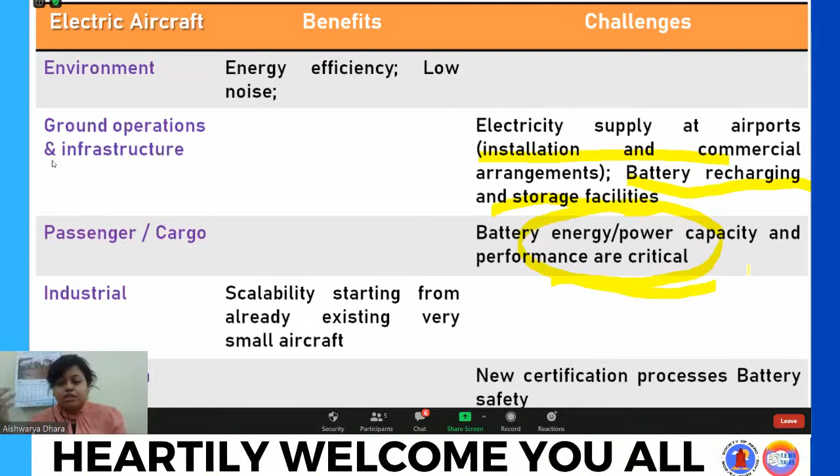As I've said, the battery energy, power capacity and performance will be critical because it cannot endure the aircraft for longer time, like the Airbus or Boeing traveling for 15 hours. So if the same thing has to be implemented in electrical aircraft, the size and weight of the aircraft will go high, and that will be a critical point. So this is one of the challenges, a huge challenge.

And then again, certification of battery safety, whether the battery can sometimes explode. So it is one of the safety concerns, you can say a prime safety concern. So all those challenges are there.

Maybe sooner or later, researchers and scientists will come up with wonderful ideas and technology, and many more technologies are on the way in upcoming years. So here I would like to end my session. If you have any further questions, please, I will be ready to answer to my best.

Thank you very much, ma'am. Yes, sir. Thank you, sir.